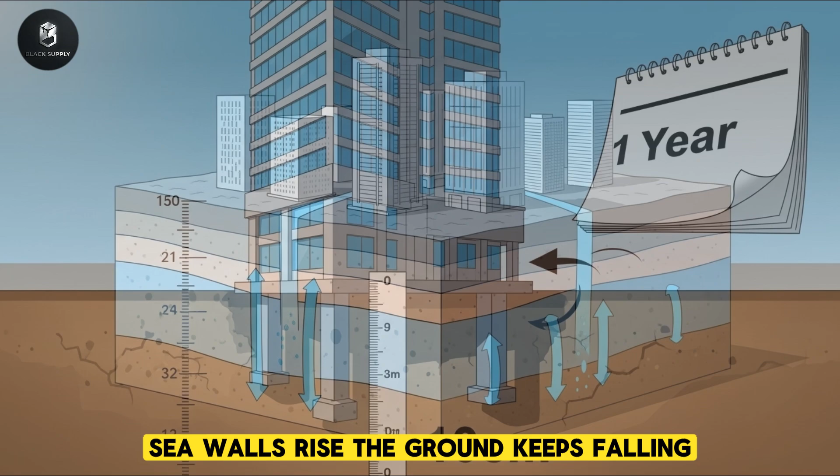In Europe, cities like Paris and London are discovering a quieter failure. Heat waves now linger longer in concrete-heavy districts. Nighttime temperatures stay high. Deaths rise not from storms, but from heat trapped between stone and asphalt.

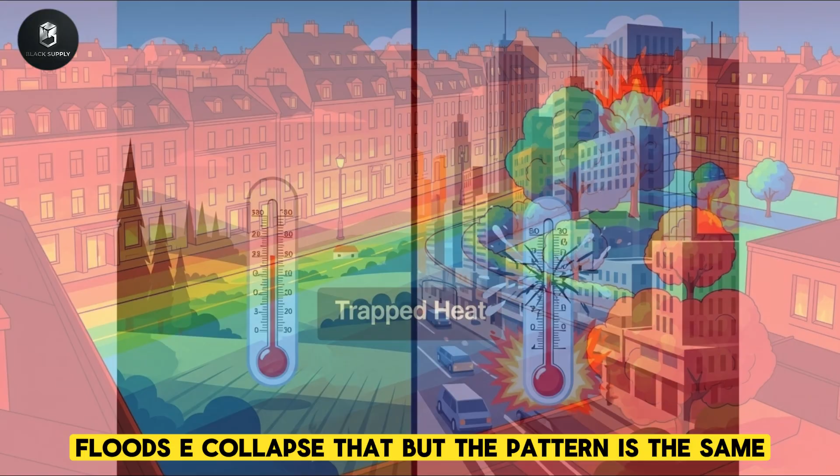Everywhere the story looks different. Floods, heat, collapse, death. But the pattern is the same. Cities keep adding concrete to solve problems created by concrete. The fixes grow larger. The failures follow. If these disasters aren't accidents, and the material is doing exactly what it was built to do, then what kind of system keeps choosing the same solution, no matter the cost?

Concrete is everywhere, but its scale is easy to miss. Every year, the world produces more than 4 billion tons of cement. That's enough to pour a layer of concrete over the entire city of London every few weeks. Cement alone is responsible for roughly 8% of global CO2 emissions, more than the entire aviation industry. And unlike planes or cars, concrete emissions are locked in the moment it's made. Once poured, the carbon is already spent.

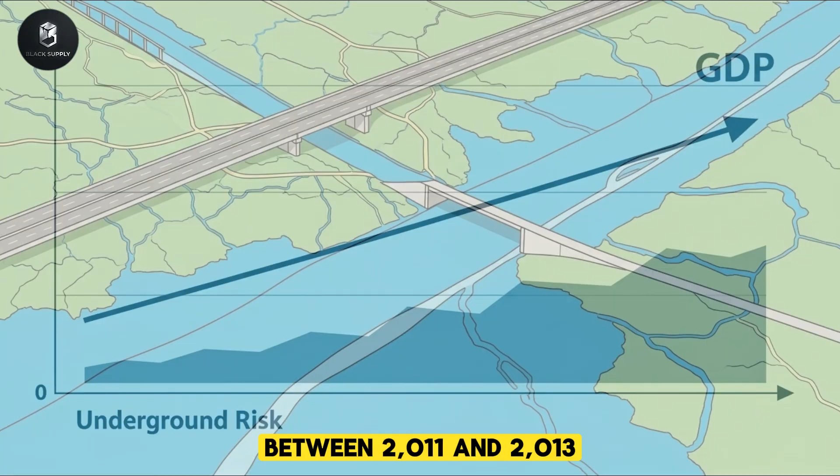China reshaped the planet faster than any country in history. Between 2011 and 2013, it consumed more cement than the United States did in the whole 20th century. Entire cities appeared almost overnight. Highways, bridges, apartment blocks, flood barriers. Growth was measured in square meters of concrete poured per year. GDP rose. Risk accumulated quietly underneath.

India is following a similar path. Cement demand is projected to double within 2 decades as hundreds of millions move into cities. New expressways cut through floodplains. Rivers are narrowed or lined with concrete walls. What looks like control on paper becomes rigidity in reality.

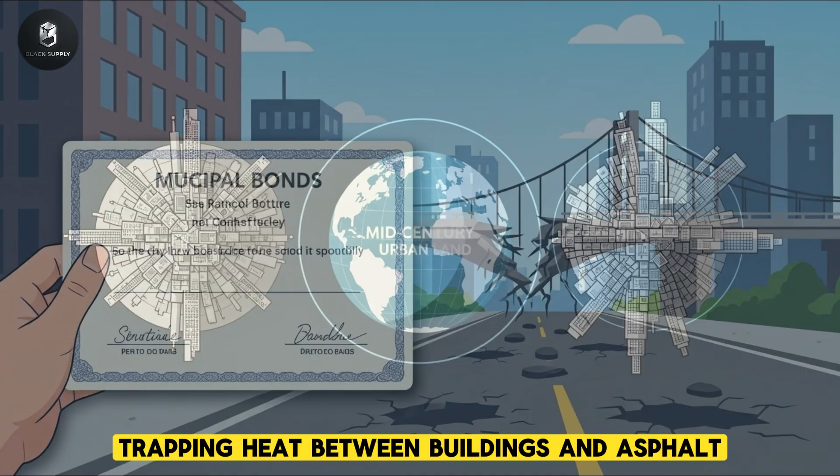In the Middle East, concrete means survival against heat. Glass and reinforced cement dominate skylines in Dubai, Doha, and Riyadh. But as urban density increases, surface temperatures rise faster than surrounding deserts. In some districts, nighttime temperatures remain dangerously high, trapping heat between buildings and asphalt. Cooling demand surges. Power grids strain. Cities pour more concrete to expand infrastructure, which in turn worsens the heat they are trying to escape.

Europe presents a different illusion. Growth is slower, but the legacy is heavier. Cities built over centuries now sit on sealed ground. In Germany, France, and the UK, more than half of urban land is covered by impermeable surfaces. Rainfall that once soaked into soil now rushes into drains designed for a different climate. Flood damage across Europe has multiplied over the last 3 decades, not because cities grew faster, but because they hardened.

In the United States, concrete became a financial instrument. Highways unlocked suburbs. Suburbs unlocked mortgages. Mortgages fueled growth. From parking lots to interstates, concrete spread as a promise of prosperity. But maintenance costs now exceed what many cities can afford. Roads crack. Bridges age. Drainage systems fail. Municipal debt rises as cities borrow just to keep concrete from collapsing.

Globally, urban land area is expected to triple by mid-century. Most of that expansion will be built the same way.

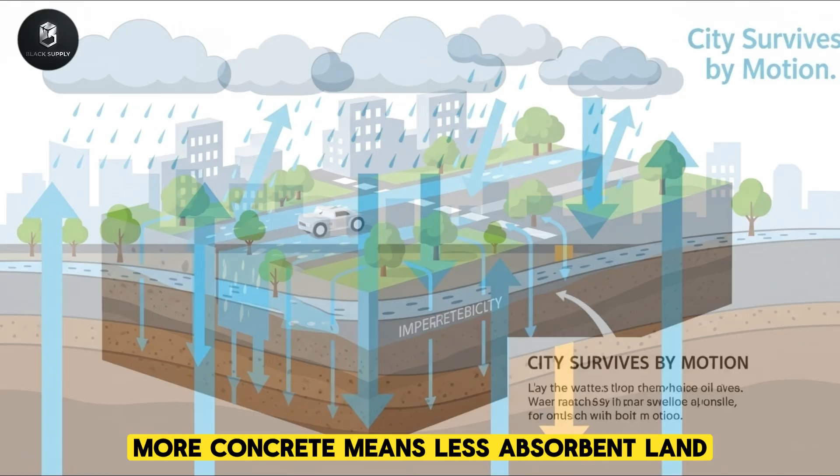Poured fast, standardized, and sealed. The math is simple. More concrete means less absorbent land. Less absorbent land means faster floods, higher heat, and deeper reliance on engineered fixes.

Yet concrete remains politically invisible. It creates jobs. It shows results quickly. A bridge can be photographed. A highway can be opened before an election. The costs, heat deaths, flood risk, subsidence, long-term debt, arrive later, often after responsibility has shifted.

This is why concrete keeps winning. It turns complex environmental problems into construction projects. It converts uncertainty into contracts. And it allows cities to grow without confronting limits. But when a material is poured at this scale, across this many climates, under this much pressure, it stops being just a building choice. It becomes a system. One that reshapes water, heat, land, and money all at once.

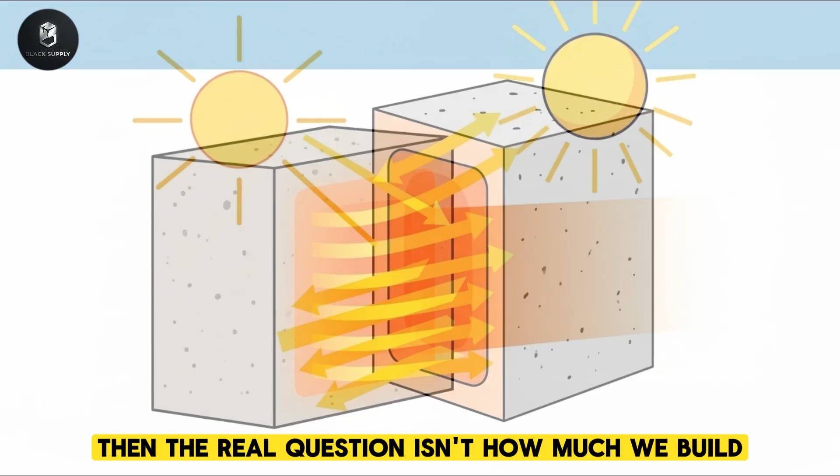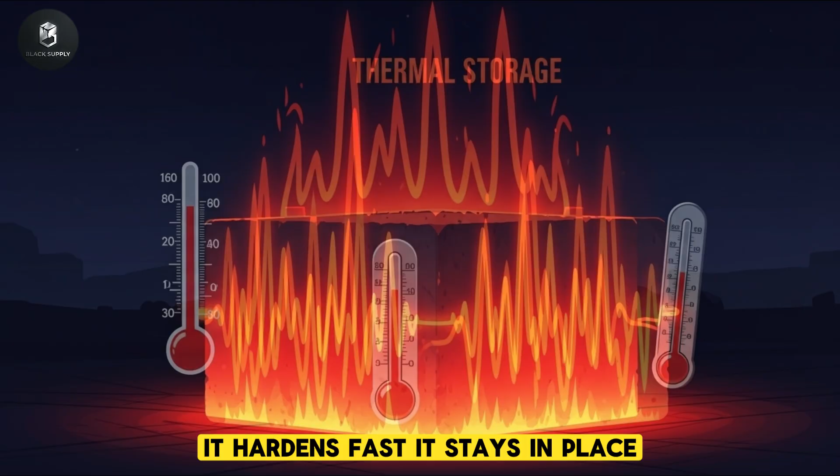If concrete is no longer just a material, but the backbone of how cities expand, then the real question isn't how much we build, but why this system cannot stop building, even when the risks are already visible. Concrete was designed to solve uncertainty. It hardens fast. It stays in place. It resists movement. That's why cities trust it. And that's exactly where the paradox begins.

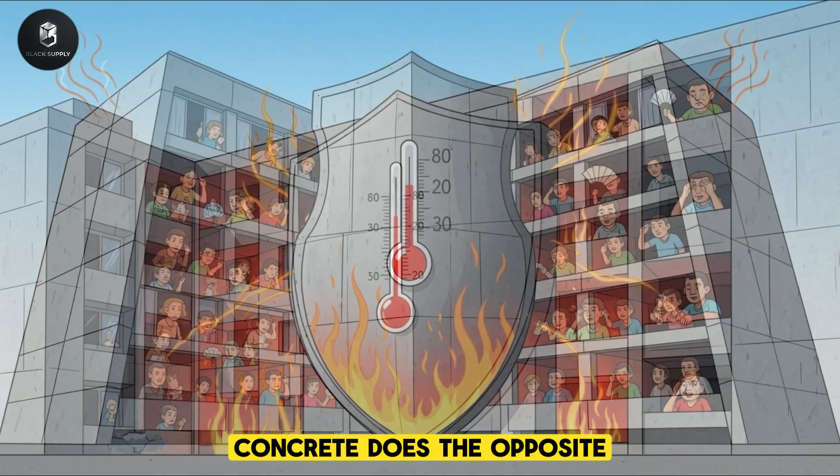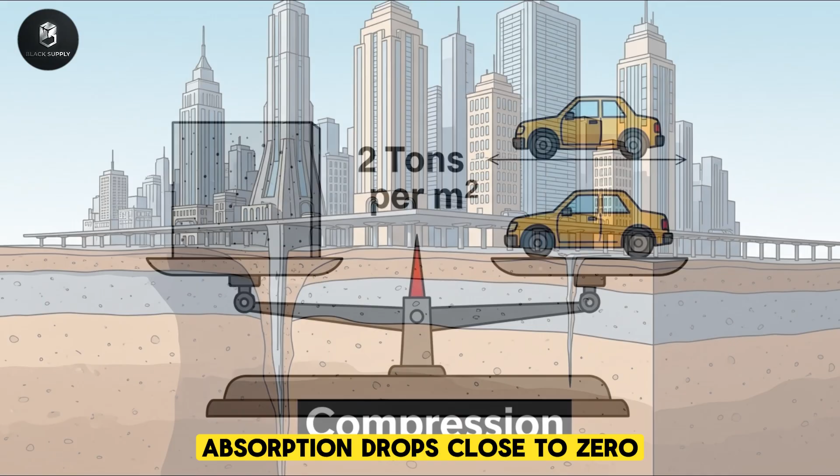A city survives by letting water move. Rain must soak into soil, spread, slow down, evaporate, or drain naturally. Concrete does the opposite. It seals the ground. It turns land into a hard lid. When rain falls on concrete, almost all of it becomes runoff. In natural ground, up to half of rainfall can be absorbed. On concrete, absorption drops close to zero. That single property reshapes everything.

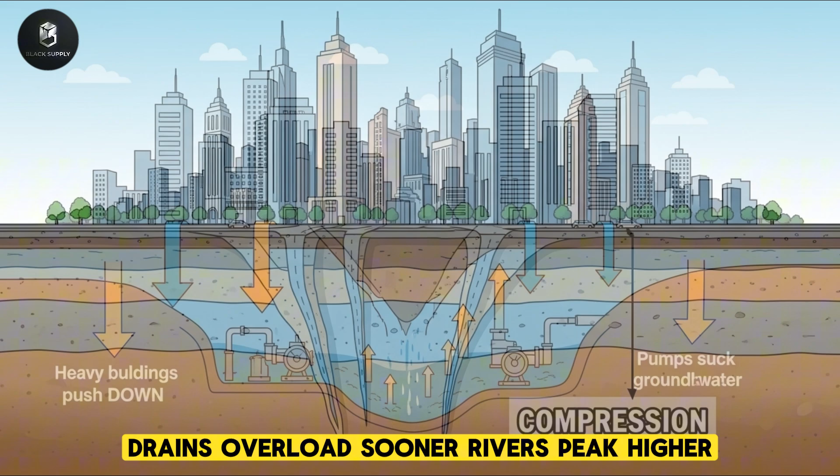Floodwater arrives faster. Drains overload sooner. Rivers peak higher. Cities respond by pouring more concrete. Wider channels, higher walls, deeper tunnels. Each fix removes more absorbent land, making the next flood sharper than the last.

Heat follows the same logic. Concrete absorbs heat during the day and releases it slowly at night. In dense cities, this traps warmth long after the sun sets. In Tokyo, summer nighttime temperatures in concrete-heavy districts can stay 5 to 7 degrees Celsius higher than nearby rural areas. In Paris, heat waves now kill more people than floods. The buildings that were meant to protect residents lock heat in instead.

Then there's weight. Concrete is heavy. Very heavy. A single square meter of reinforced concrete can weigh over 2 tons. When cities stack it, roads, towers, subways, they compress the ground beneath them. In places like Jakarta, Bangkok, and parts of Mexico City, this weight combines with groundwater extraction, causing land to sink. Some neighborhoods drop several centimeters every year. Sea walls rise. The ground keeps falling.

The paradox is that concrete is stable, but cities are not. Cities are living systems. Water levels change. Temperatures swing. Soil shifts. Climate patterns move. Concrete resists all of that. It locks cities into one shape, one assumption, one climate that no longer exists.

Engineers know this. Urban planners know this. The data is not secret. Permeable surfaces reduce flood risk. Green space cools cities. Flexible land absorbs shocks. But those solutions are slow, messy, and hard to measure. Concrete is fast. It photographs well. It shows progress immediately. So cities keep choosing rigidity over resilience.

There's another layer to the paradox. Scale. Concrete works well in small amounts. A foundation, a bridge, a retaining wall. Problems appear when it becomes the default for everything. When entire watersheds are paved. When rivers are straightened and lined. When soil is treated as a liability instead of an asset.

At that scale, concrete doesn't just support cities. It rewires them. Drainage systems become the only way water can move. Cooling systems become the only way heat can escape. Maintenance becomes permanent. Failure becomes systemic. A clogged drain floods a district. A power outage during a heat wave turns buildings into ovens.

And once a city is built this way, it cannot easily reverse course. You can't unpour concrete. You can't cheaply remove highways. You can't quickly restore soil that's been sealed for decades. Every fix becomes another layer on top of the last mistake. This is why concrete creates dependence. The more a city pours, the more it must keep pouring just to function. Not to improve, to survive.

The paradox is complete when concrete is used to fight the very disasters it amplifies. Sea walls against rising oceans. Flood channels against sealed ground. Cooling infrastructure against heat islands. Each solution treats the symptom, not the structure. Concrete doesn't fail because it's poorly made.

It fails because it works exactly as intended, rigid, sealed, unmoving, in a world that no longer is. And if the core problem isn't bad construction, but a system that keeps choosing rigidity in a changing climate, then what kind of machine keeps cities locked into the same material, even as the risks become impossible to ignore?

Concrete doesn't spread on its own. It moves through a machine. A quiet one. Once it starts, it's hard to step out. At the center of that machine is speed. Concrete is fast money. A road can be approved, poured, and opened within a political cycle. A flood barrier looks like action. A housing block looks like progress. Soil restoration takes years. Wetlands don't cut ribbons. Concrete does. This is why governments favor it.

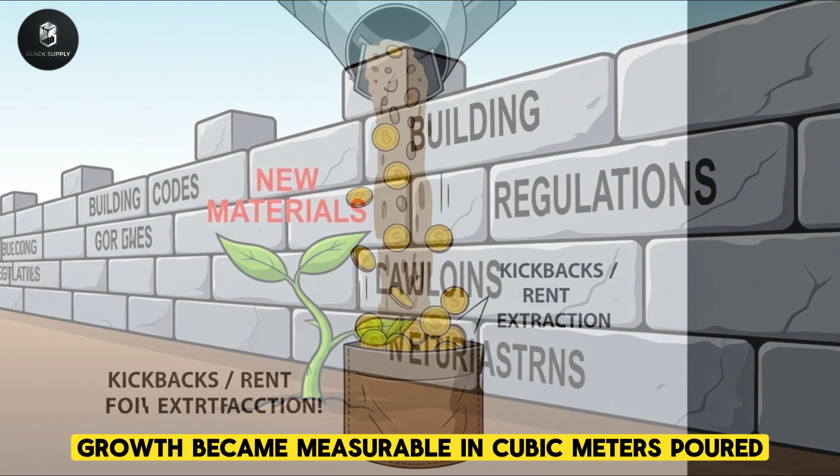Infrastructure spending boosts GDP immediately. In many countries, construction accounts for 6 to 10% of national output. In China, during peak years, it climbed even higher. Growth became measurable in cubic meters poured. When growth slows, the solution is simple. Build more. Then come the companies.

Cement production is capital-intensive and concentrated. A handful of firms dominate regional markets. Once a plant is built, it must run near full capacity for decades to stay profitable. Idle kilns bleed money. So supply pushes demand. New projects appear not because cities need them, but because plants cannot stop producing.

Public procurement locks this in. Governments don't buy resilience. They buy projects. Roads, bridges, tunnels, seawalls. Each one requires standardized materials, predictable timelines, and clear budgets. Concrete fits perfectly. Green alternatives are labeled experimental, risky, or slow. In bidding documents, flexibility becomes a liability.

Finance completes the loop. Large concrete projects are easy to finance because they look tangible. Banks prefer assets they can value, insure, and collateralize. A highway has a price tag. A restored floodplain does not. Municipal bonds fund expansion. Debt is justified by future growth. Growth depends on more construction. The cycle feeds itself.

Real estate accelerates everything. Concrete turns land into units. Units into sales. Sales into loans. In cities from New York to Shanghai, property value is directly tied to built density. More floors mean more revenue. Developers push upward and outward. The ground below becomes an afterthought. This machine doesn't ask whether concrete is the right solution. It asks whether it is the fastest one.

Maintenance keeps the system running long after the benefits fade. Concrete ages. Cracks spread. Rebar corrodes. Bridges built in the 1960s and 70s now require constant repair. In the United States alone, the maintenance backlog for roads and bridges runs into the trillions of dollars. Cities borrow not to expand, but to stop collapse. And still they pour more.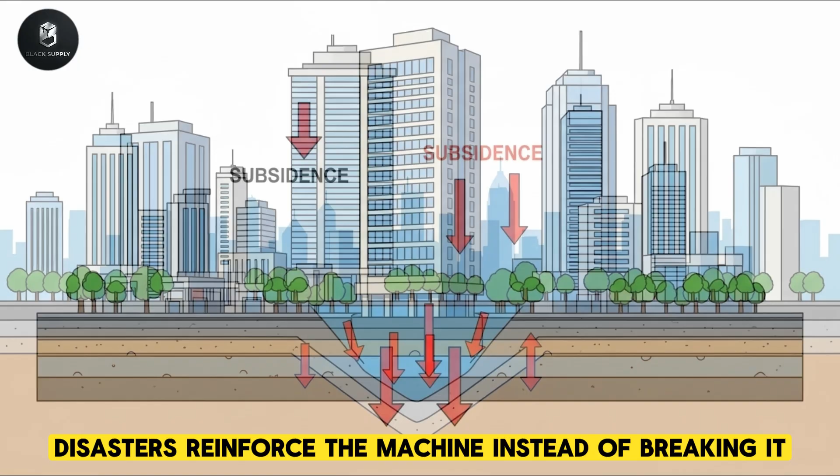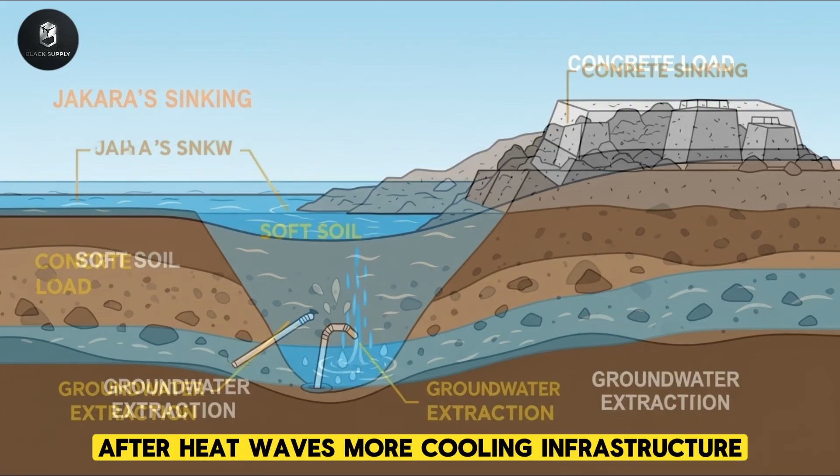Disasters reinforce the machine instead of breaking it. After floods, the response is higher walls. After heat waves, more cooling infrastructure. After subsidence, thicker foundations. Each crisis justifies another round of construction. Emergency budgets bypass scrutiny. Speed matters more than redesign.

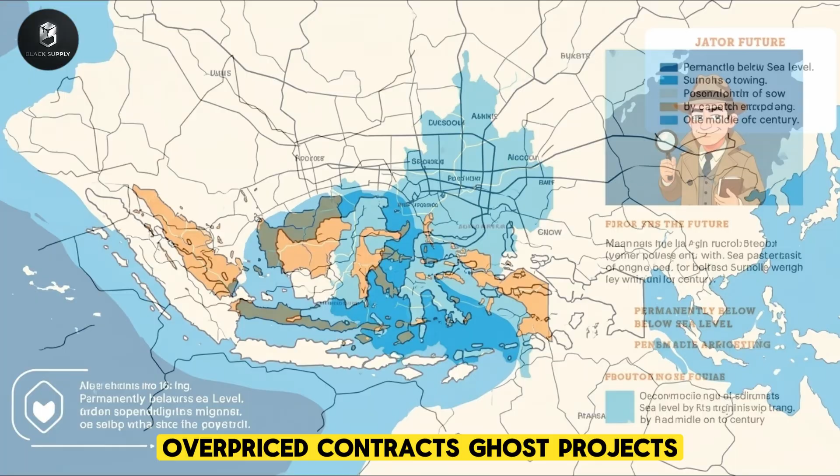In some countries, corruption seeps in. Concrete becomes a vehicle for rent extraction. Overpriced contracts. Ghost projects. Inflated volumes. In others, the process is legal but no less binding. Lobbying ensures building codes favor conventional materials. Innovation is boxed out by regulation.

Even climate policy struggles to escape this logic. Cement emissions are acknowledged, but rarely constrained. Cutting production threatens jobs, housing targets, and growth forecasts. So the industry promises efficiency gains instead. Marginal improvements. Cleaner kilns. Carbon capture sometime in the future. Meanwhile, total volume keeps rising.

The machine thrives on fragmentation. Engineers handle drainage. Architects handle buildings. Transport agencies handle roads. Climate risk sits somewhere else. No one owns the whole system. Each part optimizes locally. The result is global rigidity.

Once concrete is poured, it shapes decisions for generations. A highway fixes traffic patterns. A flood channel locks water into one path. A sealed district cannot suddenly become absorbent when rainfall changes. Cities inherit yesterday's assumptions in solid form.

And there is no pause button. Stopping construction threatens employment, growth, political credibility. Leaders who hesitate risk backlash. So they keep building, even when they know the ground is sinking, the water is rising, and the heat is climbing. This is the invisible machine.

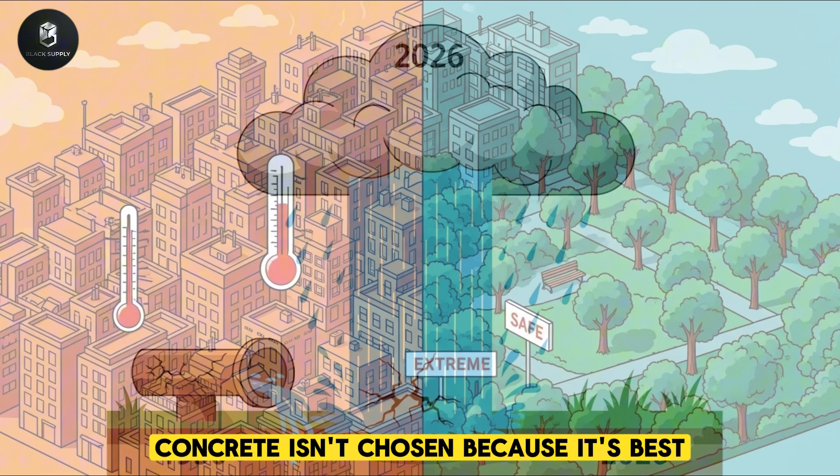Not a conspiracy. Not a single villain. A set of incentives aligned so tightly that alternatives barely register. Concrete isn't chosen because it's best. It's chosen because everything else is harder to finance, slower to justify, and less visible. Once a city enters this system, leaving it feels impossible. Every solution looks like another layer.

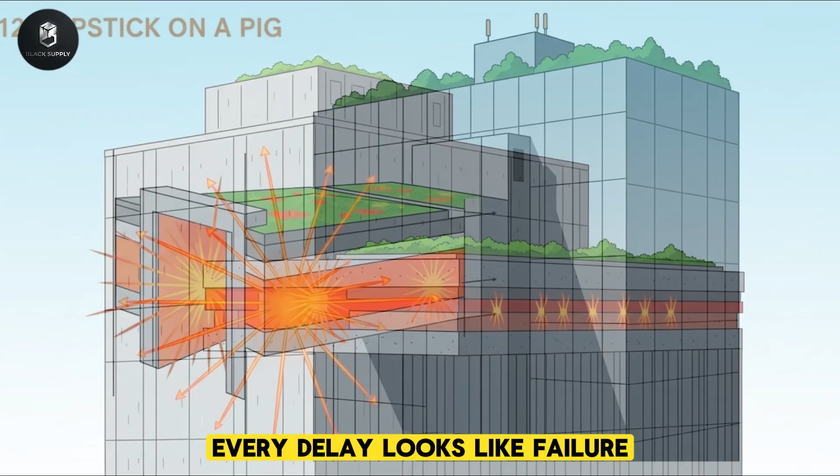Every delay looks like failure. The machine doesn't ask whether cities should keep pouring concrete. It assumes they must. And if this machine keeps cities locked into building the same way, even as floods deepen, heat intensifies, and land sinks, then what happens when its consequences finally become too large to reinforce with concrete itself?

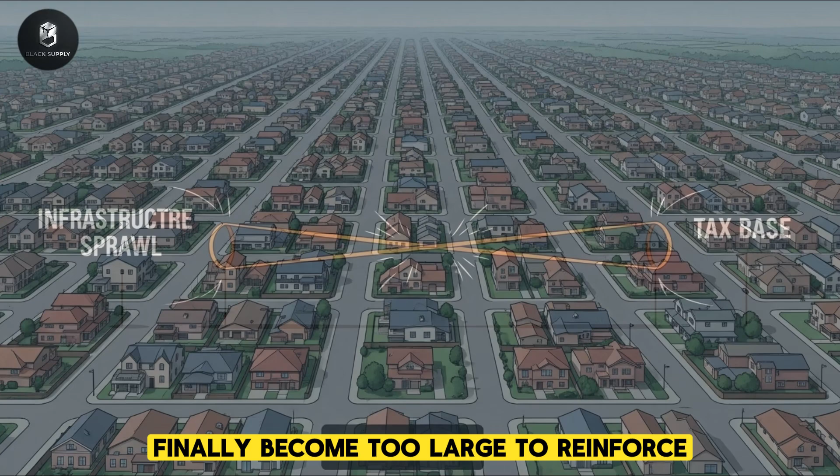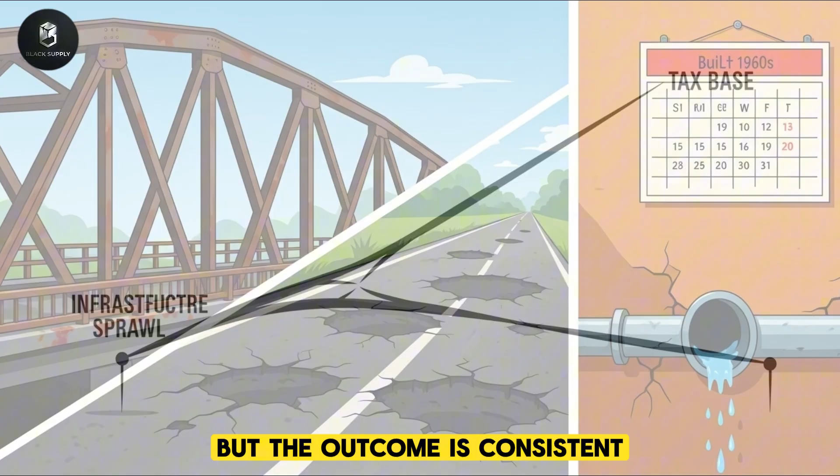The damage doesn't arrive the same way everywhere. Concrete adapts to local conditions. But the outcome is consistent. Cities harden. Nature is pushed out. Failure changes shape, not direction.

In South Asia, floods arrive fast and violent. In India, rapid urban expansion has replaced floodplains with roads, malls, and apartment blocks. In cities like Chennai and Bengaluru, lakes that once absorbed monsoon rain were filled or walled off. In 2015, Chennai flooded after days of rain. Water had nowhere to spread.

Losses exceeded $3 billion. Just 4 years later, the same city faced a water crisis so severe that reservoirs ran dry. Concrete caused both extremes. Too much water, then none.

In Southeast Asia, subsidence is the quiet killer. Jakarta is sinking faster than almost any major city on Earth. In some northern districts, land drops more than 10 centimeters a year. The reasons are layered: groundwater extraction, soft soil, and massive concrete load from highways, ports, and high-rise developments. Sea walls are built higher every decade. But the city keeps sinking behind them. By mid-century, parts of Jakarta are expected to sit below sea level permanently.

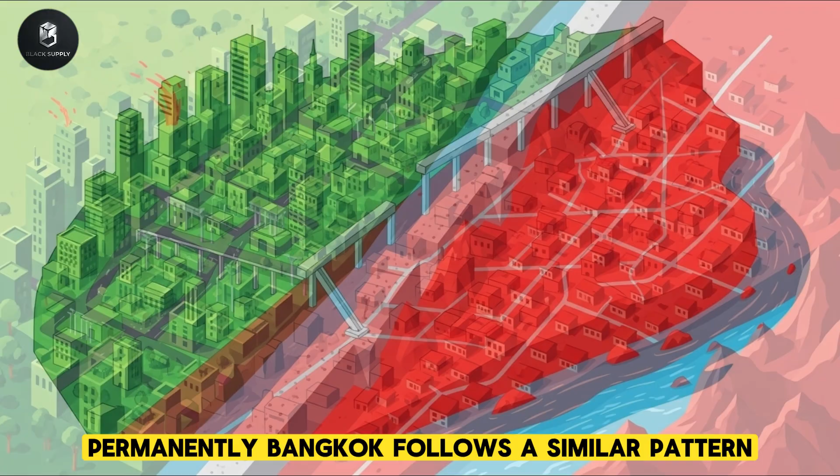Bangkok follows a similar pattern. Concrete expansion and heavy buildings compress the ground while canals are filled or narrowed. Flood protection relies on pumps and barriers. When power fails or rainfall exceeds capacity, water rushes in. The city becomes dependent on constant energy just to stay dry.

In the Middle East, heat is the battlefield. Cities like Dubai and Riyadh rely on concrete and glass to grow vertically in extreme climates. But these materials trap heat. In dense districts, surface temperatures soar. Air conditioning becomes essential, not optional. Cooling demand consumes vast amounts of electricity, much of it generated from fossil fuels. Heat feeds power use. Power feeds emissions. Emissions intensify heat. Concrete sits at the center of the loop.

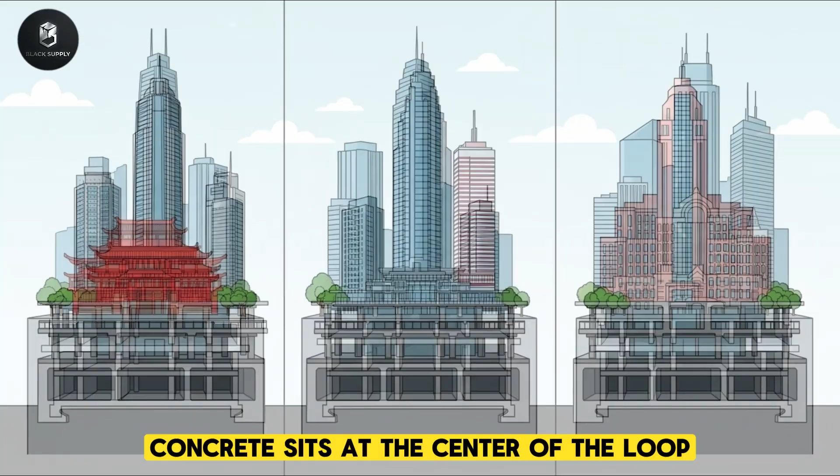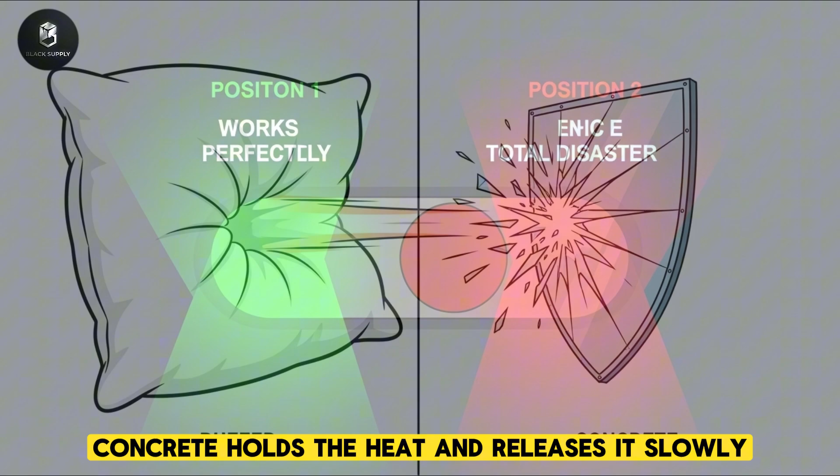During recent heat waves, nighttime temperatures in parts of the Gulf remained above levels considered safe for human recovery. The danger isn't just the daytime peak. It's that bodies never cool down. Concrete holds the heat and releases it slowly, turning entire neighborhoods into thermal storage units.

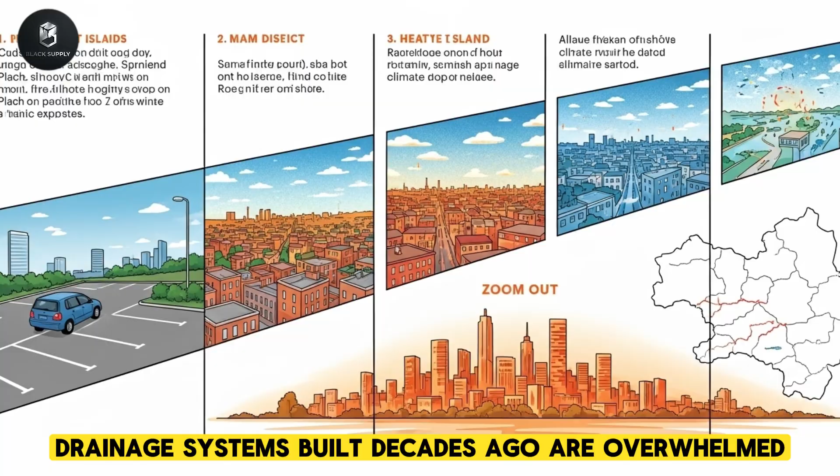In Europe, the damage looks subtler but spreads wider. Cities like Paris, Cologne, and Milan were built long before modern climate shifts. Over time, streets were paved, courtyards sealed, rivers straightened. Today, more than half of urban land in many European countries is impermeable. When heavy rain hits, drainage systems built decades ago are overwhelmed. Flood damage across Europe has multiplied in recent decades. Even where rainfall hasn't increased dramatically, the land simply can't absorb shocks anymore.

Heat waves reveal another layer. In 2003, tens of thousands died across Europe during extreme heat. Many deaths occurred in dense, concrete-heavy neighborhoods where temperatures stayed high overnight. Since then, cities have added green roofs and shade in limited areas, but the underlying structure remains sealed.

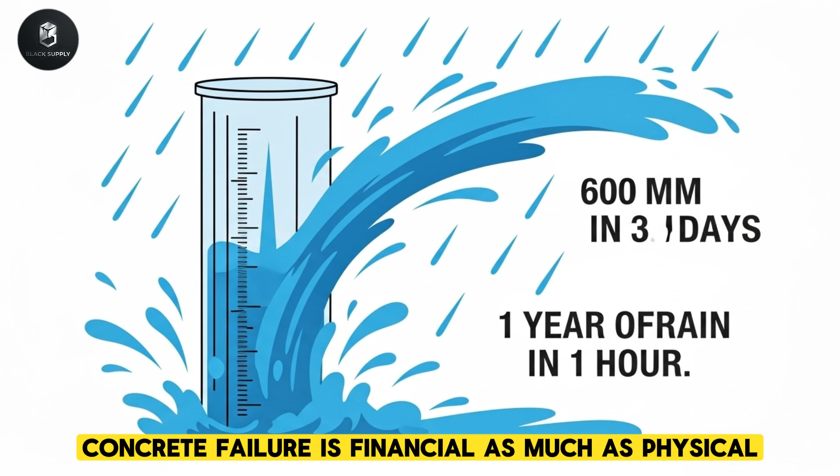In North America, concrete failure is financial as much as physical. Suburban expansion covered vast areas with roads, parking lots, and low-density housing. Infrastructure stretched outward faster than tax bases could support. Maintenance costs now overwhelm municipal budgets. Bridges built during post-war booms age at the same time. Drainage systems designed for smaller storms face heavier rainfall. Cities borrow to repair what they already built, while new development continues at the edge.

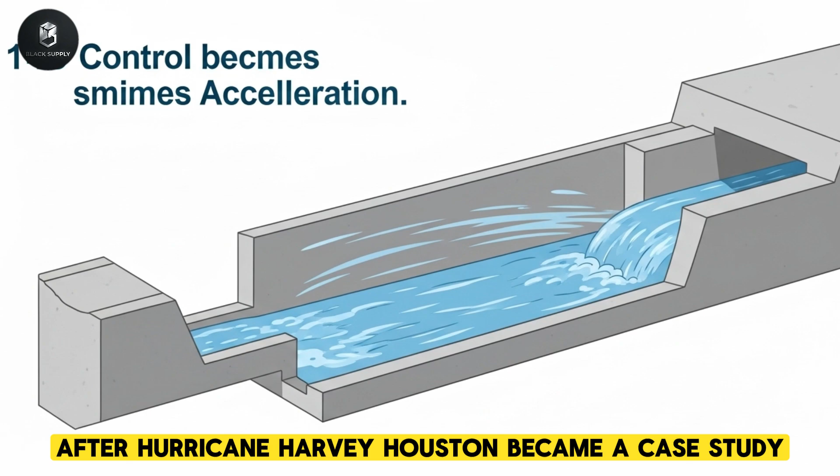After Hurricane Harvey, Houston became a case study. Wetlands had been replaced by concrete subdivisions. Rainfall totals were extreme, but the scale of flooding was amplified by land use. Billions were spent on recovery. New flood control projects followed. More concrete was poured. The underlying pattern remained unchanged.

In Latin America, informal settlements collide with formal concrete expansion. In cities like Sao Paulo and Mexico City, rapid construction pushes low-income communities into flood-prone zones. Hillsides are stabilized with concrete walls. Rivers are channelized. When systems fail, the poorest areas absorb the impact. Landslides, flash floods, infrastructure collapse. Concrete protects wealthier districts while concentrating risk elsewhere.

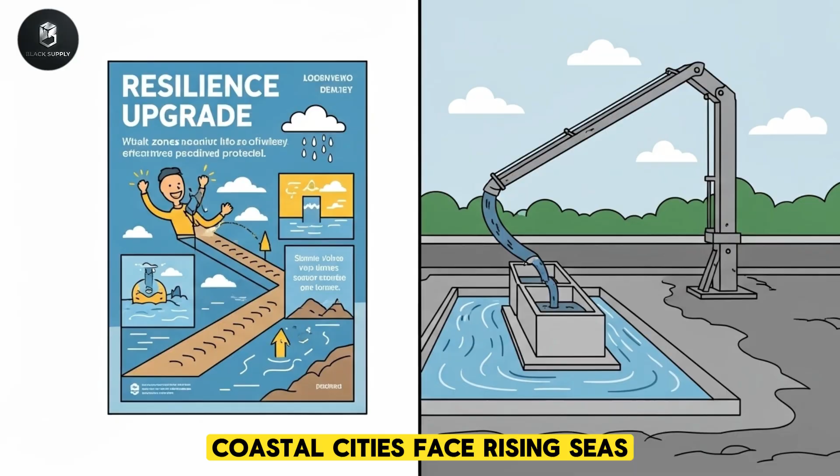Across Africa, the pattern is emerging fast. New highways, ports, and urban developments promise growth. But many are built without integrated water management. Coastal cities face rising seas while sealing land inland. When floods hit, recovery resources are limited.

Each new concrete project increases exposure. The map looks different on the surface. Floods here, heat there, subsidence somewhere else, debt everywhere. But the structure is shared.

Concrete removes flexibility. It forces cities to rely on engineered control rather than natural buffering. When climate variability increases, control systems must be larger, faster, and more expensive. Failure becomes binary. Systems work until they don't. Then damage is sudden and widespread.

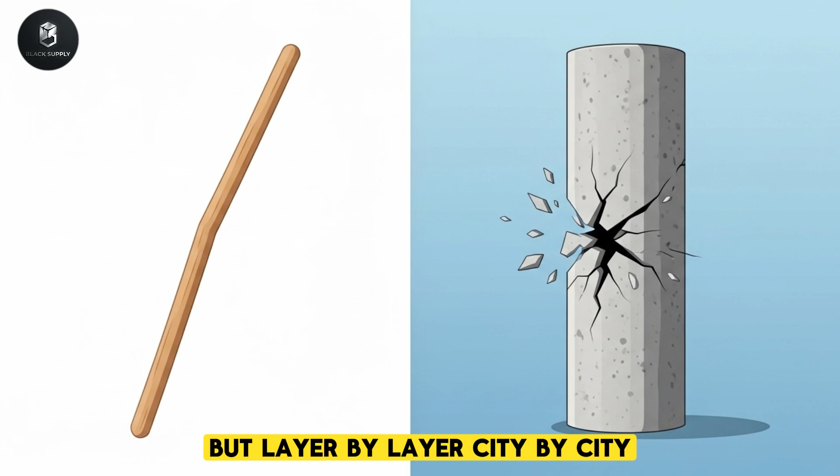What makes this destruction harder to see is timing. Concrete problems compound slowly. A sealed parking lot doesn't flood the city on its own. A single tower doesn't cause subsidence. A widened channel doesn't overheat a district overnight. But layer by layer, city by city, the same logic repeats.

Each region believes its case is unique. Each response is local. But when you zoom out, the pattern becomes impossible to ignore. The same material, the same incentives, the same outcomes. This is not a future scenario. It's already mapped in losses, deaths, and repair bills across continents. Concrete hasn't just reshaped cities. It has synchronized their vulnerabilities.

And if this damage keeps spreading differently but predictably across the world, then the next question isn't where the next failure will happen, but when a single disaster finally exposes how fragile the entire system has become. The breaking point rarely looks dramatic at first. It arrives on a normal day, inside systems that were declared complete.

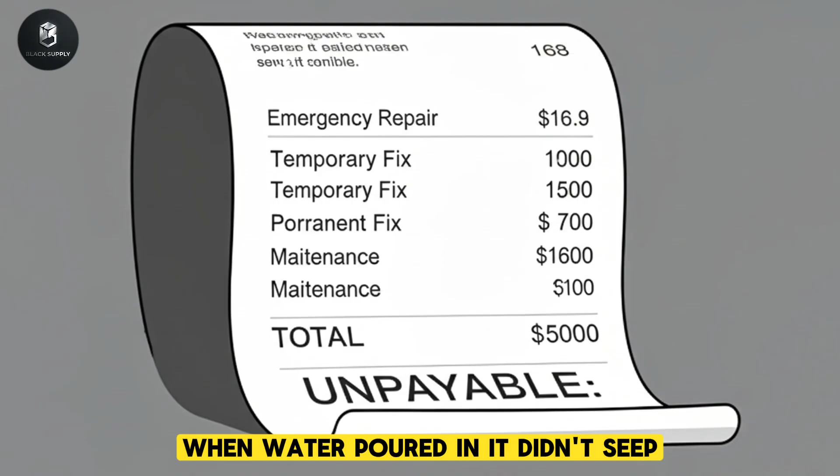On July 20th, 2021, Zhengzhou recorded more than 600 millimeters of rain in 3 days. In 1 hour, rainfall exceeded what the city was designed to handle in an entire year. The flood defenses were new. The tunnels were modern. The concrete was fresh. When water poured in, it didn't seep. It rushed. Subway tunnels filled in minutes. Trains stopped between stations. 14 people died underground.

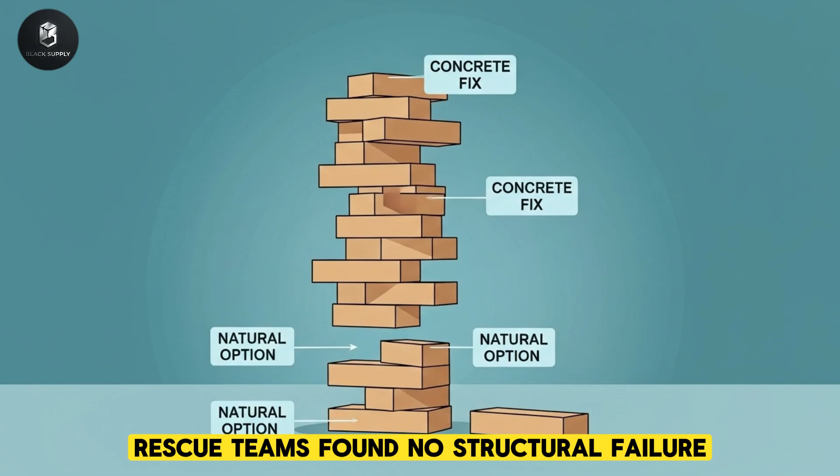Rescue teams found no structural failure. The system worked exactly as engineered. It just had no margin. Zhengzhou was not poor. Billions had been spent on drainage upgrades, widened channels, and reinforced embankments. The city had sealed its ground to control water. When the rain arrived, control became acceleration. Water had only one direction left.

2 years earlier, Venice experienced its own moment of collapse. In November 2019, the city flooded under Acqua Alta levels not seen in half a century. Sea barriers were still incomplete. Streets turned into canals. Shops were destroyed. Residents waded through saltwater inside historic buildings. Venice had invested heavily in concrete barriers to hold the sea back. But the city itself had been sinking for decades under its own weight, while sea levels rose. Protection arrived late, rigid, and incomplete.

In Jakarta, the crisis is slower but more certain. The city sinks every year. In some neighborhoods, streets are repaved repeatedly as the ground drops beneath them. Houses tilt. Cracks spread. Sea walls rise higher. The government announces plans to move the capital. Meanwhile, concrete towers continue to go up. Ports expand. Highways are reinforced. Each layer adds weight to soil already collapsing. The fix deepens the cause.

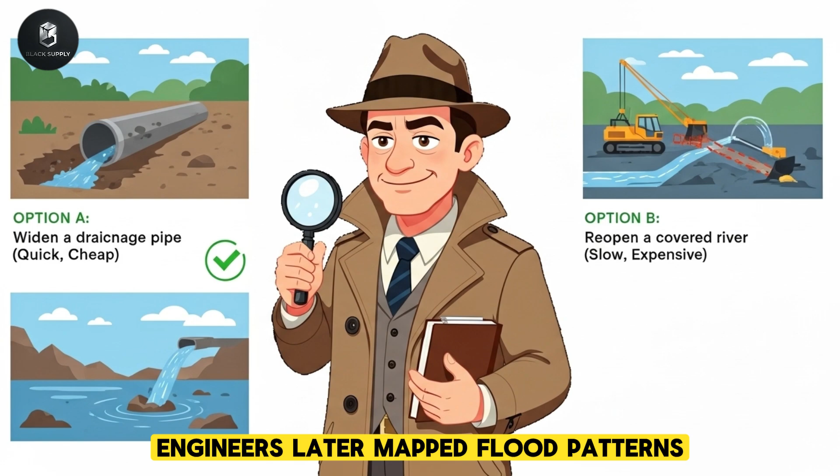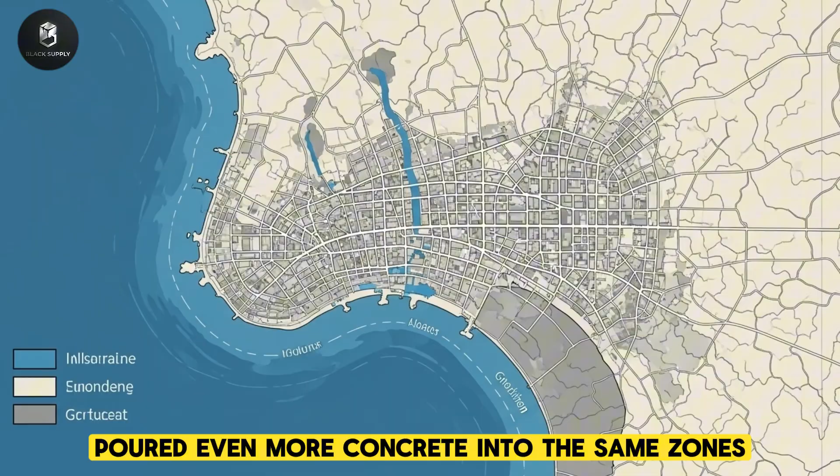In Houston, the collapse is measured in dollars. Hurricane Harvey didn't break levees. It overwhelmed them. Over $125 billion in damage followed. Engineers later mapped flood patterns and found that development had pushed water into neighborhoods never meant to absorb it. Wetlands that once slowed storms had been replaced by subdivisions, parking lots, and roads. After the flood, rebuilding poured even more concrete into the same zones. The city promised resilience. The footprint stayed the same.

In Germany's Ahr Valley, July 2021 floods killed over 180 people. Small rivers rose meters within hours. Concrete channels sped water through towns faster than evacuation could keep up. Villages built to manage normal flows were erased by extreme ones. Investigations found no single failure. Warnings existed. Models existed. Infrastructure existed. The scale had changed. The rigidity remained.

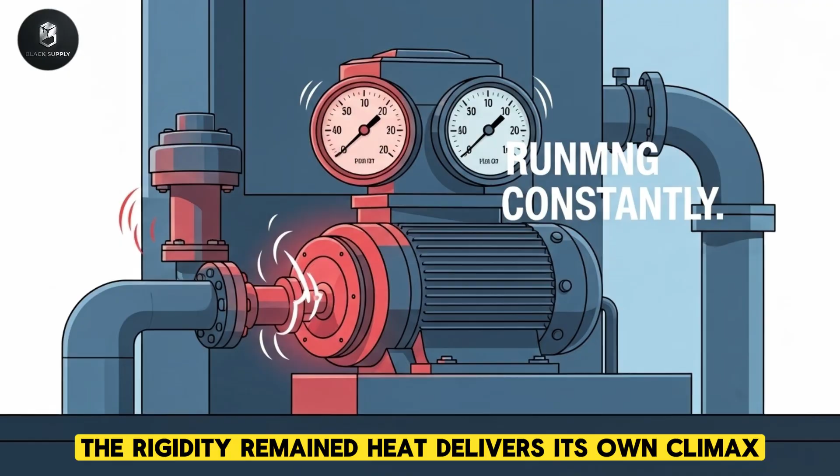Heat delivers its own climax. During Europe's recent heat waves, deaths climbed quietly. Many occurred at night, when bodies failed to cool. Dense, concrete-heavy neighborhoods retained heat long after sunset. Air conditioning helped those who had it. Others opened windows to air that never cooled. Hospitals filled. Power grids strained. There was no collapse moment, just exhaustion and silence.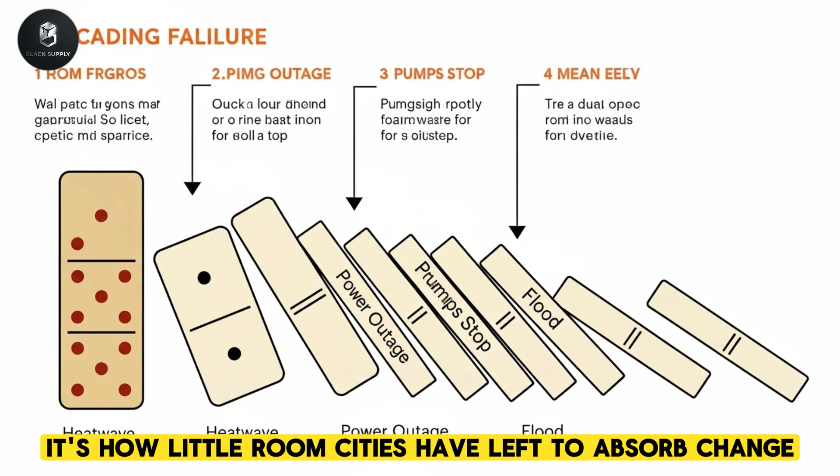These events aren't outliers. They are thresholds being crossed. What links them isn't rain, or sea level, or temperature. It's how little room cities have left to absorb change. Concrete removes buffers. It converts gradual stress into sudden failure. When systems reach their limit, they don't bend. They snap. The human cost concentrates where flexibility is lowest.

Underground stations. Basement apartments. Informal housing near channels and walls. People die where water accelerates and heat traps. Not because cities ignored risk, but because they engineered it out of sight.

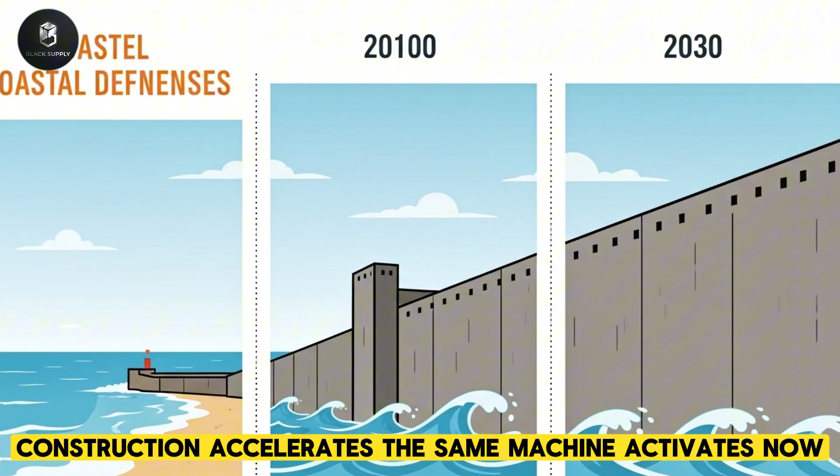After each disaster, the response looks familiar. More barriers. Deeper tunnels. Thicker foundations. Larger budgets. Emergency powers speed approvals. Construction accelerates. The same machine activates, now fueled by urgency. Politicians promise protection. Engineers promise upgrades. Developers promise safer designs. The material stays the same.

The footprint grows. The most revealing moment often comes after the cameras leave. Insurance payouts stall. Repair costs exceed estimates. Cities borrow to rebuild. Maintenance schedules stretch. Temporary fixes become permanent. The burden shifts forward in time.

Concrete doesn't fail suddenly. It fails cumulatively. Each project reduces options. Each repair commits cities to higher maintenance. Each barrier assumes yesterday's climate. When tomorrow arrives faster, there's no space to adjust.

At the climax, cities face a choice they rarely acknowledge. Keep reinforcing rigidity, or accept that the foundation itself is part of the problem. One path is visible, funded, and familiar. The other requires undoing, slowing down, and redesigning systems that entire economies depend on. So far, almost everywhere, the decision is the same.

Cities respond to concrete-driven disasters by pouring more concrete. They mistake strength for resilience. They treat symptoms as causes. And with every cycle, the margin shrinks.

If the most catastrophic failures are happening not because cities lacked infrastructure, but because they had too much of the wrong kind, then what happens when the next shock exceeds even reinforced limits, and there's nothing left to harden without breaking everything beneath it? Collapse doesn't arrive as one final event. It spreads. Slowly. Quietly. And by the time it's visible, reversing it is no longer an option.

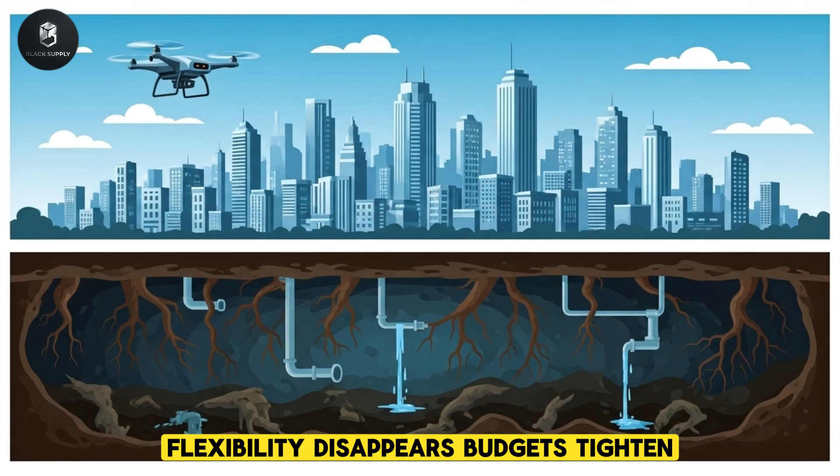In the United States, the estimated backlog for basic infrastructure repair runs into the trillions of dollars. Cities borrow just to keep systems functioning at yesterday's level. Expansion pauses. Repair becomes permanent. As costs rise, flexibility disappears. Budgets tighten. Emergency funds replace planning. Short-term fixes dominate long-term design.

Drainage pipes are widened instead of land being reopened. Cooling systems are added instead of shade being restored. Each decision locks the city further into concrete dependence.

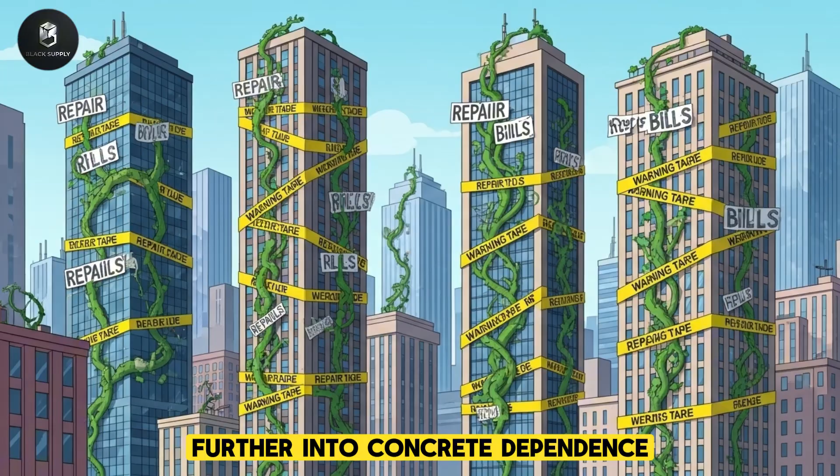Then comes insurance retreat. Flood risk maps are updated. Premiums rise. Coverage shrinks. In coastal and flood-prone cities, insurers quietly pull back. Some neighborhoods become uninsurable. Property values stall or fall. Mortgages become harder to secure. What was once a growth engine turns into a liability.

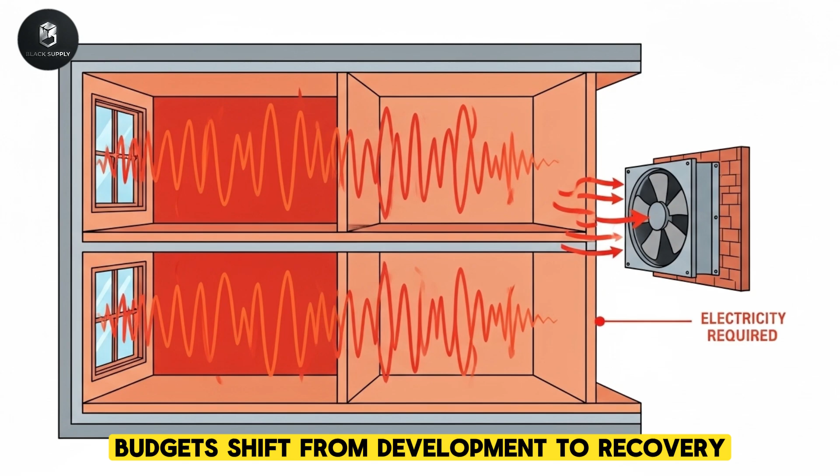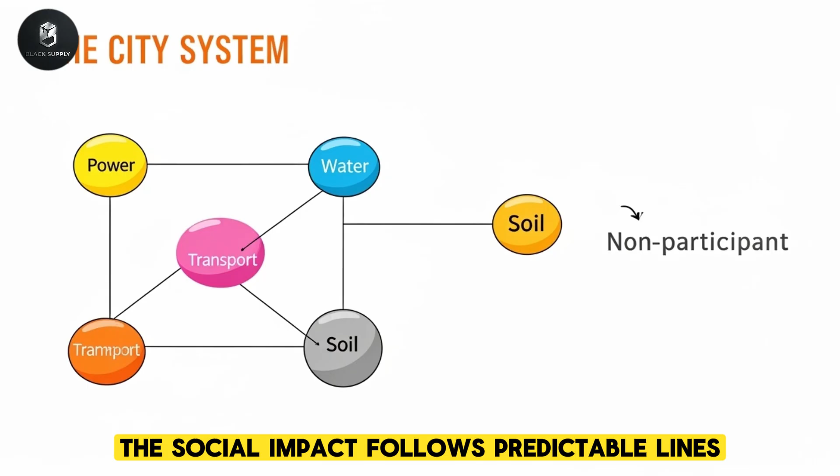When insurance leaves, governments step in. Public funds replace private risk. Disaster relief becomes routine. Budgets shift from development to recovery. Taxes rise or services are cut. The financial burden spreads beyond affected zones. Everyone pays for rigidity.

The social impact follows predictable lines. Wealthier districts protect themselves first. Higher walls. Better pumps. Backup power. Poorer areas absorb overflow. Basement apartments flood. Informal housing collapses. Heat kills where cooling is unavailable. Concrete doesn't distribute risk evenly.

It concentrates it. In many cities, water systems become the breaking point. Pumps must run constantly. Power outages turn floods into disasters within minutes. During extreme heat, electricity demand spikes. Grids strain. When cooling fails, concrete buildings turn into heat traps. Hospitals prepare for surges. Mortality rises without headlines.

Subsidence accelerates quietly. As land sinks, drainage gradients fail. Pipes reverse flow. Roads buckle. Rebuilding becomes endless. Each repair adds weight. Each layer pushes ground lower. The city fights gravity with concrete. Gravity always wins.

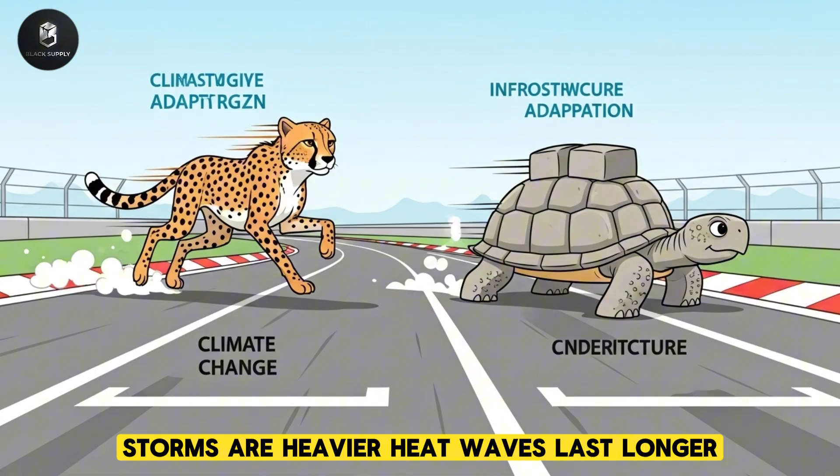Climate volatility magnifies every weakness. Storms are heavier. Heat waves last longer. Droughts dry soil. Then floods overwhelm it. Concrete cities have no buffer left. Systems designed for averages face extremes. Failure becomes sudden and cascading.

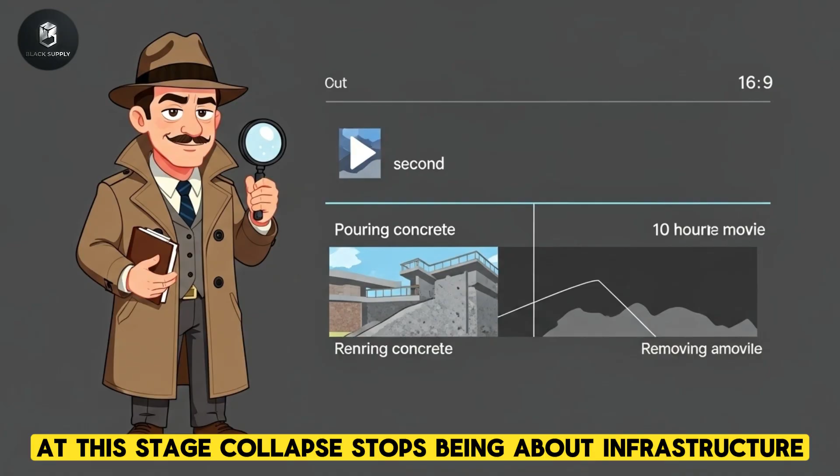At this stage, collapse stops being about infrastructure. It becomes about governance. Leaders face impossible trade-offs. Spend billions to protect shrinking zones, or retreat. Reinforce walls, or relocate communities. Raise taxes, or cut services. Every option angers someone. Delay becomes the default.

Retreat is politically toxic. Concrete made expansion visible and rewarding. Retreat looks like defeat. So cities defend what they built, even when the cost exceeds the value. Sunk costs dictate future spending. The past controls the present. You can see this pattern repeating. Coastal defenses that grow higher every decade.

Drainage systems rebuilt after every major storm. Heat plans activated every summer. Each response acknowledges failure without changing structure. Collapse stretches over years instead of days.

Eventually, the system reaches a point where growth no longer offsets decay. New projects exist only to support old ones. Infrastructure feeds on itself. Debt rises. Credit ratings weaken. Investment slows. Maintenance is deferred again.

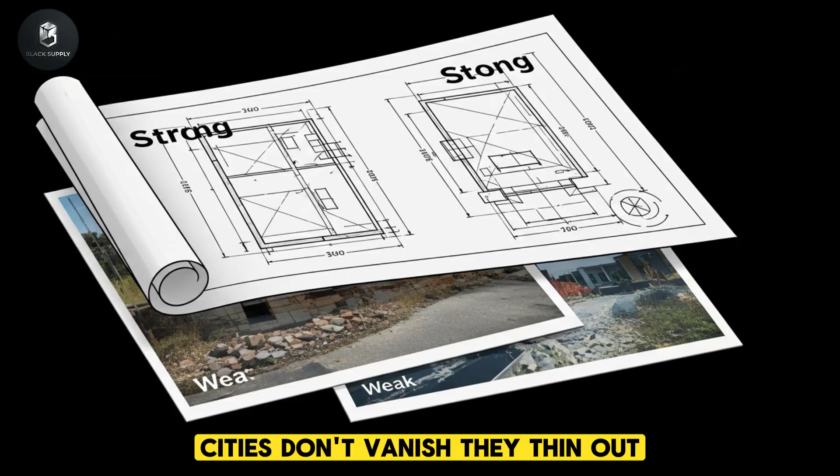Cities don't vanish. They thin out. Services degrade. Inequality sharpens. Safe zones shrink. Risk becomes normalized. Flood warnings become routine. Heat alerts become background noise. Collapse becomes part of daily life.

This is the final stage of concrete dependency. Not spectacular ruin, but managed decline. A city that still stands, still functions, but only by pouring more resources into holding its shape against forces it can no longer absorb.

Concrete was meant to create permanence. Instead, it creates fragility that must be constantly defended. Every year, every budget cycle, every storm. At some point, the math stops working. The cost of keeping rigidity alive exceeds what the city can produce. When that moment arrives, choices narrow fast.

Protect less. Abandon more. Shift risk onto those least able to carry it. Collapse doesn't ask for permission. It advances through maintenance schedules, insurance tables, bond markets, and emergency plans. By the time it's named, it's already locked in.

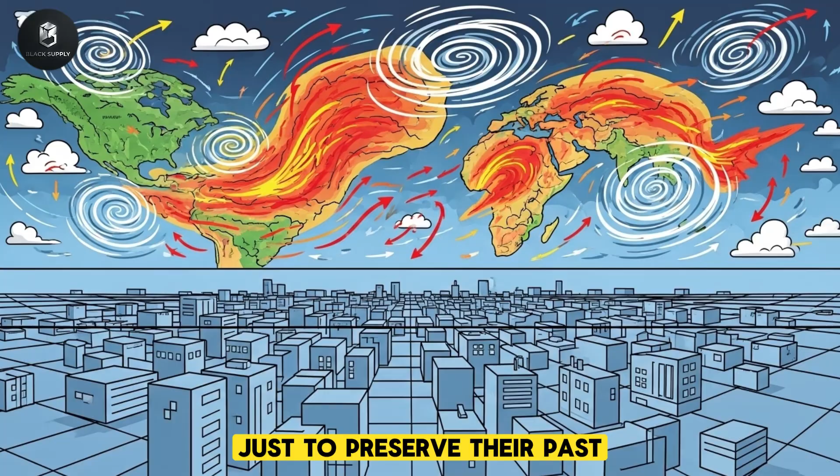If cities built on concrete are now spending their future just to preserve their past, then the question is no longer how to fix the damage, but whether it's even possible to step out of a system that turns every solution into another layer of the same problem.

Concrete was supposed to make cities permanent, solid, predictable, a way to freeze progress in place. For decades it worked. Or at least, it looked like it did. The skylines rose. Roads spread. Flood barriers climbed higher. Each layer felt like control. Each project felt like an answer. Cities grew heavier, denser, more impressive. From above, everything looked finished.

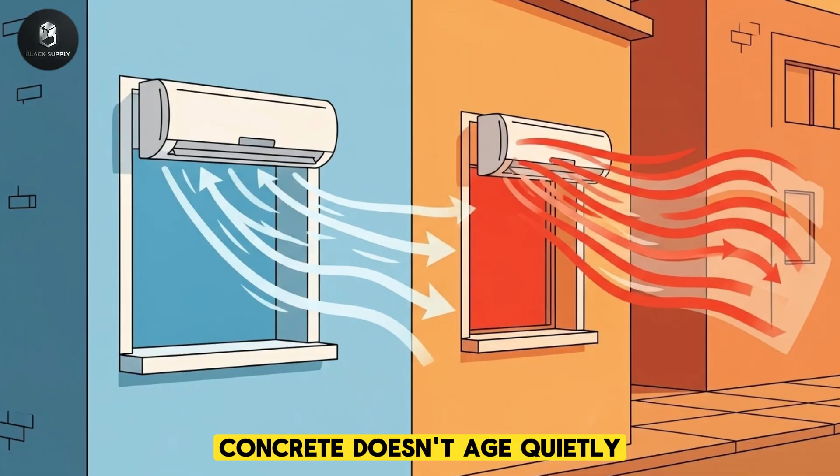But permanence has a cost. Concrete doesn't age quietly. It demands attention. Maintenance schedules grow. Repair budgets expand. Emergency plans replace long-term thinking. What was once built to enable growth now exists just to hold ground.

Cities begin to live inside their own structures. Water can only move where pipes allow it. Heat escapes only if power stays on. Soil no longer participates. Nature becomes an external threat instead of part of the system. Every deviation must be corrected with machinery, energy, and money.

This is the moment when the illusion breaks. Not in a single disaster, but in repetition. Flood after flood. Heat wave after heat wave. Repair after repair. The question shifts from, how do we fix this? To, how long can we keep fixing it this way?

Concrete is honest. It does exactly what it was designed to do. It resists change. It locks decisions into place. It turns short-term certainty into long-term obligation. When climate, water, and heat begin to move faster than structures can adapt, rigidity becomes risk.

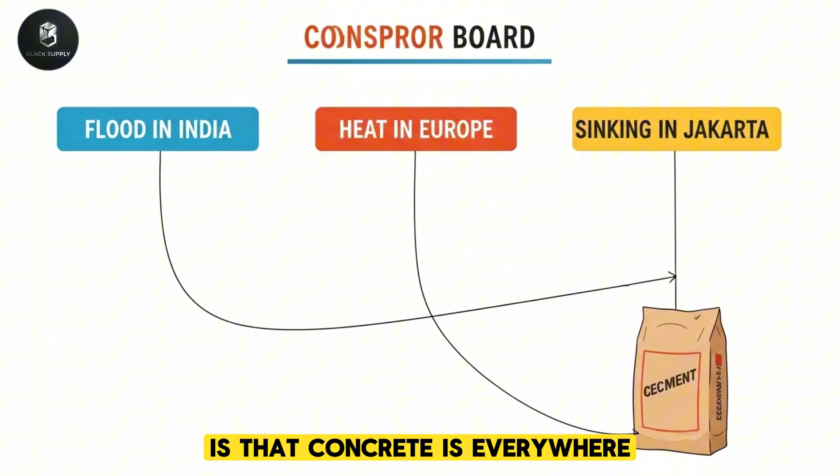What makes this harder to face is that concrete is everywhere. It underpins housing targets, employment, finance, politics. Entire economies are built on pouring, maintaining, and defending it. Stepping away isn't just an engineering challenge. It's a social one, a financial one, a political one.

Undoing concrete is slow, expensive, often invisible. You can't ribbon cut a restored floodplain. You can't photograph cooler nights. You can't measure avoided disasters the way you measure a bridge. Prevention doesn't look like progress. It looks like restraint. So cities keep choosing what they know.

Another barrier. Another tunnel. Another reinforced slab. Each one feels safer than the uncertainty of change. Each one buys time at the cost of options. The result is a strange kind of modern city. More advanced than ever. More dependent than ever. Stronger on paper. Weaker in reality. A place where survival depends on continuous intervention, constant funding, and perfect coordination.

Concrete didn't quietly destroy cities. It made them efficient, productive, and impressive, until those same qualities became liabilities. Until speed replaced balance. Until control replaced flexibility. Until permanence met a world that no longer holds still.

The question now isn't whether concrete built modern cities. That part is settled. The question is whether cities built on a material that cannot adapt can survive in a century defined by constant change. And if the foundations beneath our cities were designed for a world that no longer exists, what happens when the ground, literal and political, keeps shifting, but the concrete never does?